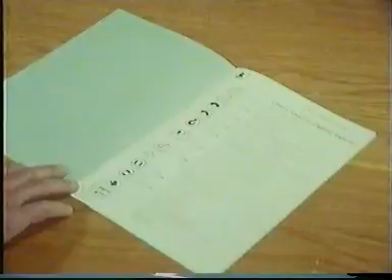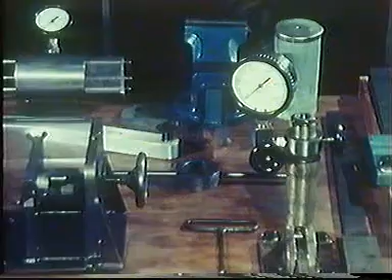Fuel valve overhauls should be carried out in a special locality where there is no risk of contamination by swarf or grit. Start by laying out the tools and checking that everything is in order, especially the working surfaces of the grinding plate and the grinding ring, etc.

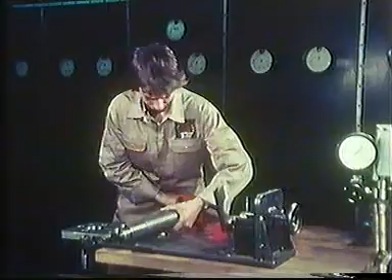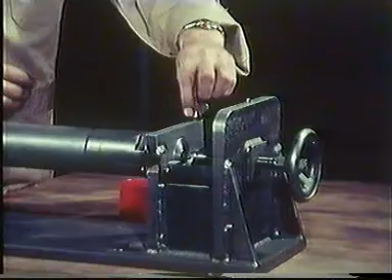The fuel valve overhaul should be carried out in a special clamping jig which is supplied with the engine. A bench vise should not be employed. Take out the adjusting screw together with the feeler pin, thrust spindle and spring.

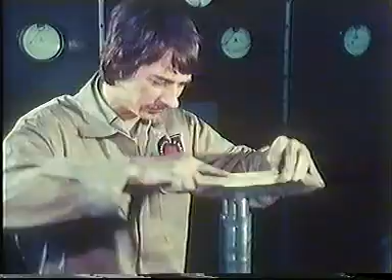Unscrew the nuts for the slit filter and remove the filter by means of the extractor tool, which is positioned by screwing it into the threaded hole provided in the filter body. Raise the valve into the vertical position and clean the nozzle with a wire brush. Before undoing the sleeve nut, any carbon deposits between the nut and the nozzle should be removed with a milling tool.

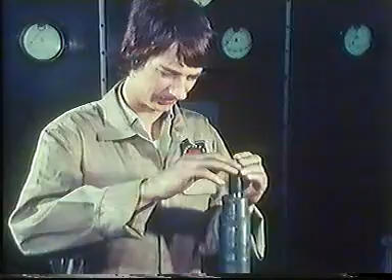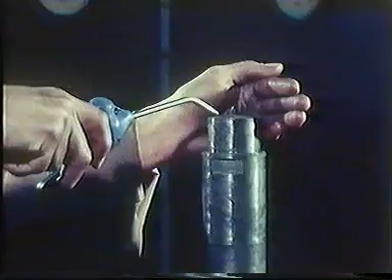Lower the valve into the horizontal position and lock it in the clamping jig. Before loosening the sleeve nut, the clamping jig thrust spindle must be tightened against the nozzle. Otherwise, the dowel pins in the nozzle or the housing might be shorn when the sleeve nut is loosened. The sleeve nut should be loosened with an impact spanner, not with a torque spanner. Remove the sleeve nut, nozzle, spindle guide assembly and rubber ring.

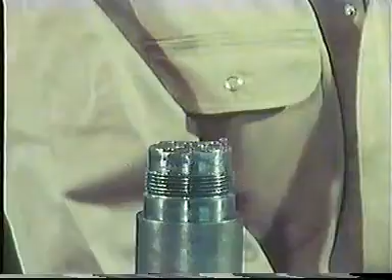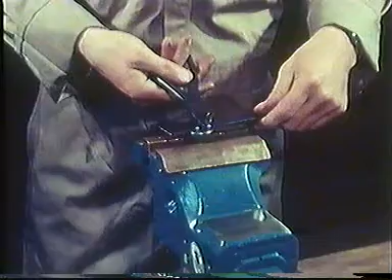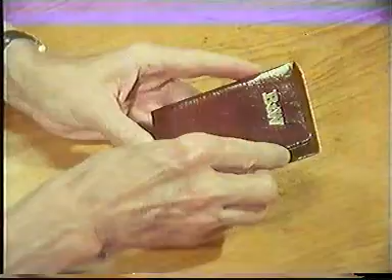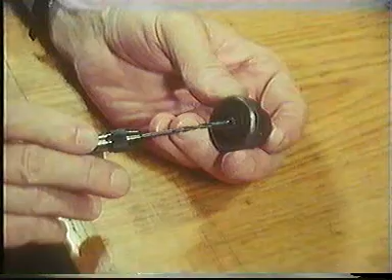Take out and scrap the dowel pins in the housing and nozzle. Remember to place a protective plate under the pliers in order not to damage the mating surfaces, which must provide a perfect oil-tight seal. The atomizer hole cleaning drills, fixtures and test pin are supplied in a separate plastic case. During cleaning of the center hole and atomizer holes, the nozzle tip should point upwards to allow any dirt to fall out.

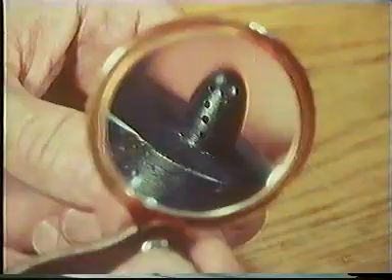Examine the atomizing holes by means of a magnifying glass. They must be circular and keen-edged. Having ensured that the hole geometry is in order, the dimensions are checked by means of the test pin. If the pin is able to enter one or more of the atomizing holes, the nozzle must be scrapped.

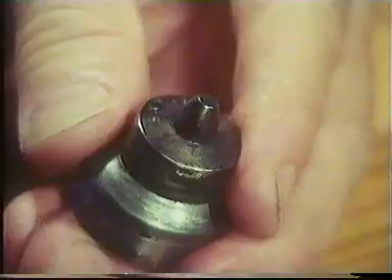The sealing face of the nozzle against the spindle guide is to be lapped on the grinding plate using emery powder number 70 and some solvent. Apply steady movement to and fro and do not turn the nozzle. Note that the nozzle is shifted to the dry part of the plate during the last few strokes.

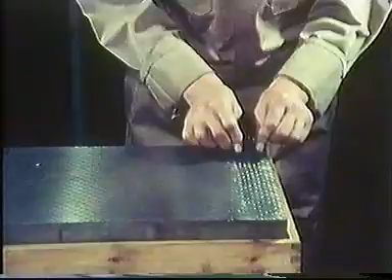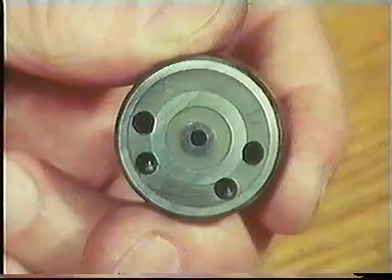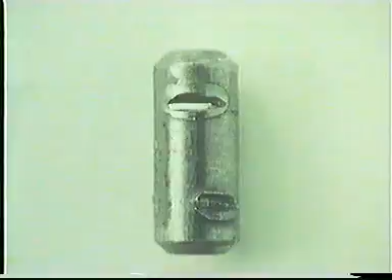After the lapping, there must be no marks or scores in the sealing surface, apart from the very fine lines that result from the lapping. Flush the nozzle through with a solvent and blow it dry with compressed air. Always fit new dowel pins. The old ones must not be used again.

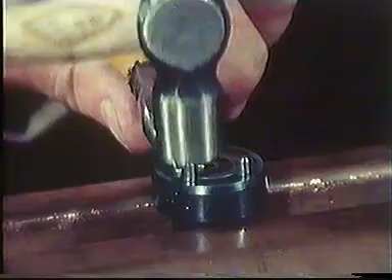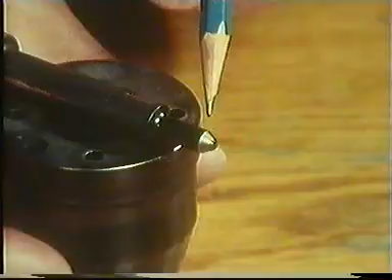Check the spindle and spindle guide. If the spindle is corroded, or if the width of the conical seat is more than approximately 0.5 millimeters, the pair must be exchanged. These parts cannot be reconditioned on board.

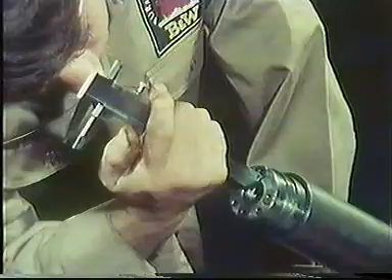The lift of the valve spindle is checked by first measuring the distance between the sealing faces of the housing and the upper edge of the stop ring. In this case, it is 13.4 millimeters. Then, secondly, the distance is measured between the top of the spindle and the sealing face of the spindle guide. Here, it is 12 millimeters. The difference indicates the lift of the spindle, which in this case is 1.4 millimeters.

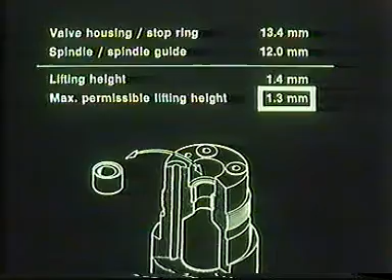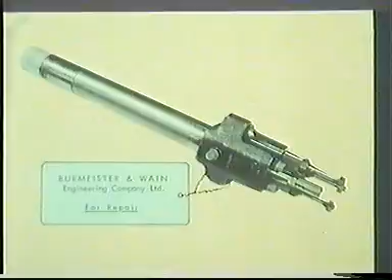For all KEF type engines, the maximum permissible value is 1.3 millimeters, and consequently the stop ring must be taken out and a new ring adapted. This job should normally not be carried out on board, but instead the housing should be sent either to Burmeister & Wain or to one of our authorized repair shops.

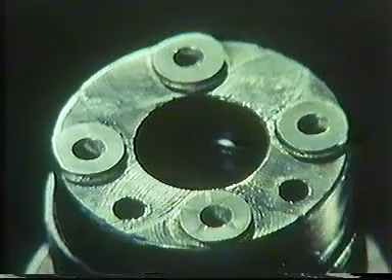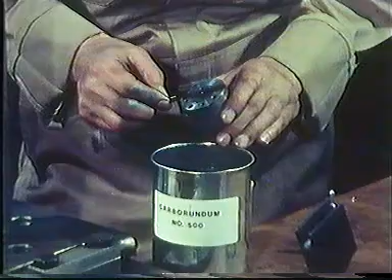If damage marks or scores are found on any of the four sealing surfaces of the housing, the spindle guide and housing must be ground to match. Before grinding, fill the apertures with Vaseline. This ensures that no grinding paste will enter them during grinding. Fit the guide ring on the housing. Using carborundum number 500, grind the spindle guide and housing to match.

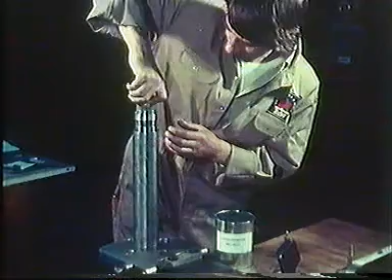After the grinding, wipe the parts carefully clean with a clean cloth and check the sealing surfaces. Lap the spindle guide in the same way as the nozzle, the last few strokes being on the dry part of the grinding plate.

After the lapping, there must be no marks or scores in the sealing surface, apart from the very fine lines from the lapping process. Flush the spindle guide through with solvent and blow it dry with compressed air.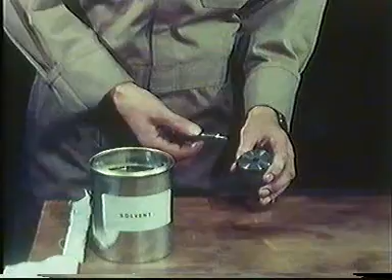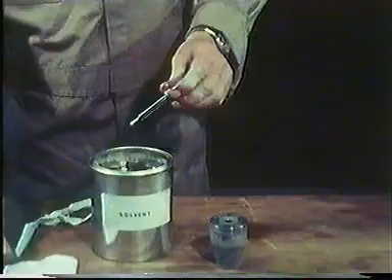Then, clean the bore of the spindle guide with a clean cloth on a small wooden stick. Wipe the spindle dry and dip it in acid-free oil before inserting it in the spindle guide.

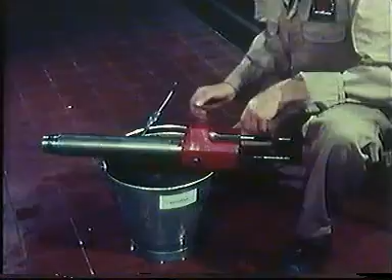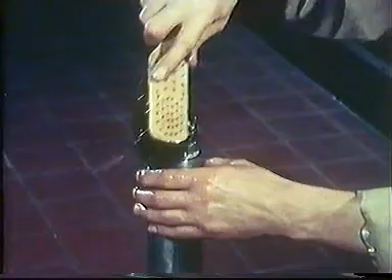Clean the housing thoroughly with kerosene and blow through with compressed air. Note the direction for blowing. Always blow from the valve head towards the nozzle end.

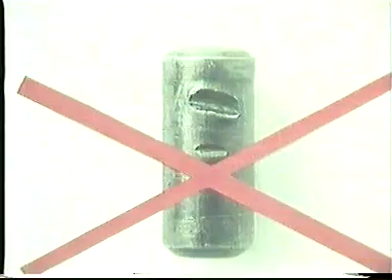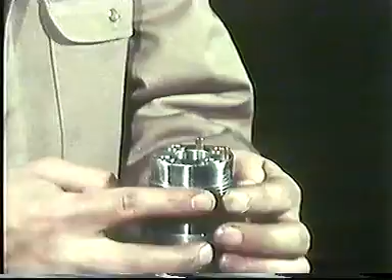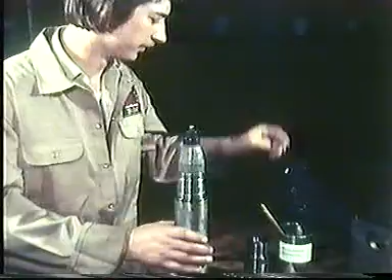Once again, remember to fit completely new dowel pins. Also fit a new rubber sealing ring between the housing and the sleeve nuts. Then, with the spindle in place, fit the spindle guide on the housing and thereafter place the nozzle on the spindle guide. The threads and pressure faces are smeared with molybdenum disulfide.

Mount the sleeve nut and tighten it lightly by hand. Lower the valve into the horizontal position in the clamping jig and lock it. Remember to tighten the clamping jig thrust spindle against the nozzle tip. This is in order to avoid shearing the dowel pins, which would result in misaligned atomizer jet directions in the engine cylinder.

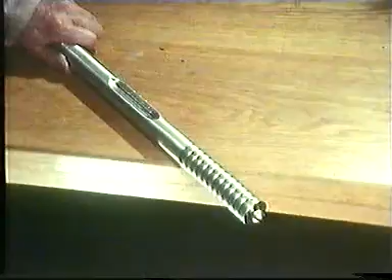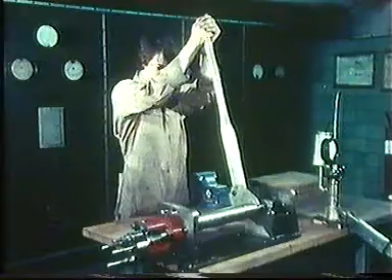The tightening torque for the sleeve nut is indicated in the data book. For the K84 type, it is 40 kilopond meters. This torque spanner will give a jolt and a click when the correct tightening torque is reached.

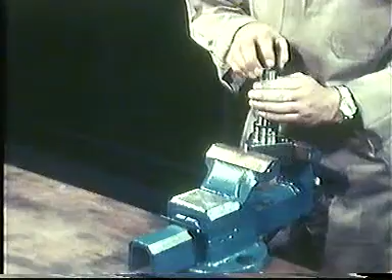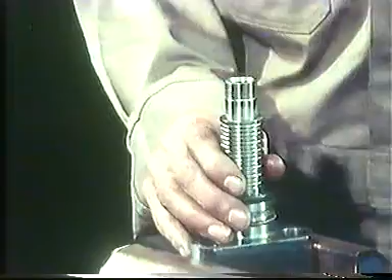Dismantle the slit filter in a vise fitted with protective jaws. Unscrew the sleeve nuts. Remove the sealing ring, spring guide and spring and take out the non-return valve disc. Take out the vent screw and remove the thrust ring.

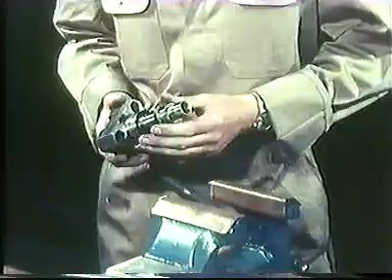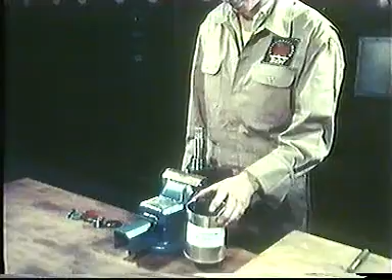If there are damage marks or scores in the valve seat, it should be ground with carborundum number 500 on the grinding mandrel supplied. If there are marks in the vent screw seating, this can be refaced with a pin drill fitted in an ordinary hand drilling machine.

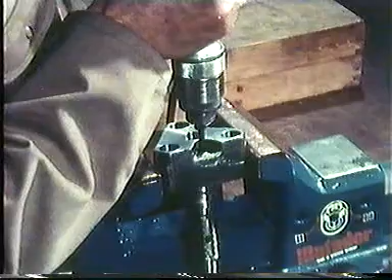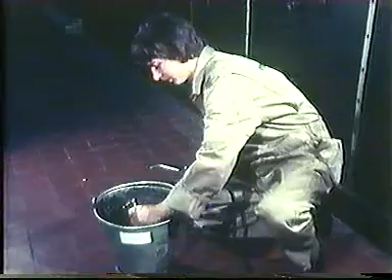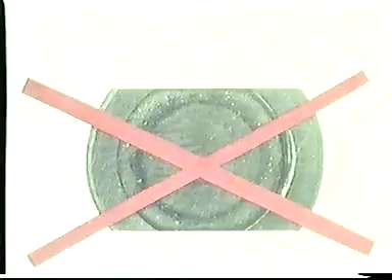After refacing the seat, the filter housing should be cleaned with kerosene and blown dry with compressed air. The disc of the non-return valve should not be reconditioned by grinding. If it is defective, it must be scrapped and a new one fitted. A convenient method of replacing the valve disc in the housing is, for instance, to stick it on the end of a pencil by using a small blob of Vaseline.

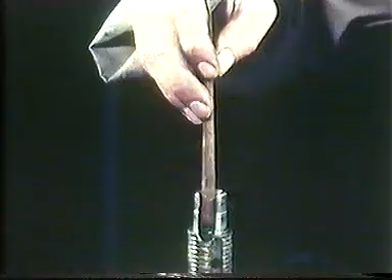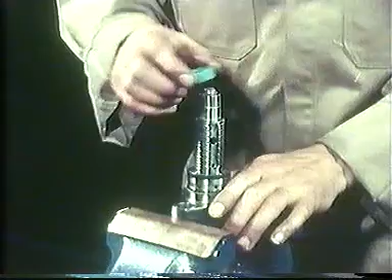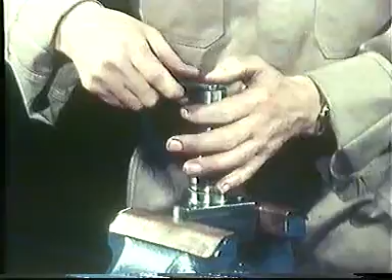Position the spring, spring guide, thrust ring, sealing ring and sleeve nut, and tighten the sleeve nut with the pin spanner. When the filter has been assembled, it should be tested in the jig supplied. Clamp the filter in the testing jig.

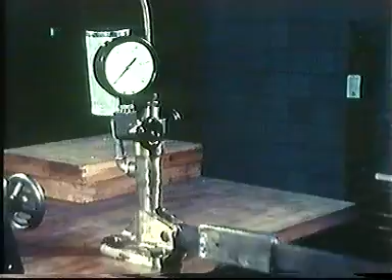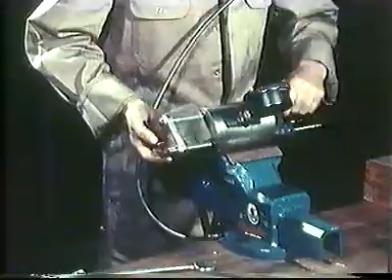Fit the pressure pipe on the filter inlet and check the opening pressure of the non-return valve. The opening pressure is stated in the data sheet. For the K84 engine, it is about 13 kilopond per square centimetre. When the opening pressure has been checked, the pressure pipe should be removed from the filter and the testing jig with the filter should be rotated half a turn in the vise. Then the pressure pipe should be connected to the testing jig.

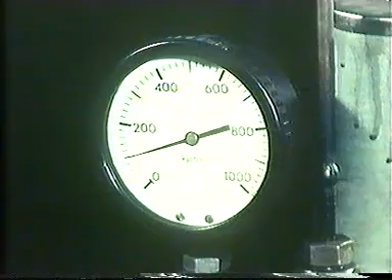The non-return valve and the filter sealing ring should remain oil tight at a pressure of 100 kilopond per square centimetre. This can be checked by ensuring that no oil leaks out at the filter inlet. Smear the filter with molybdenum disulfide and insert it in the housing.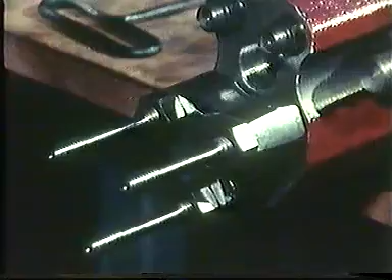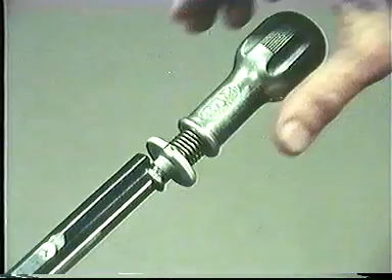To ensure even tightening, the filter stud nuts should be tightened in 3 distinct stages with a torque spanner. The first stage is performed with a torque spanner set at a moment of 3 kilopond meters. Before each tightening operation, the knurled disc of the spanner should be retracted and rotated a quarter of a revolution. When the correct tightening torque has been reached, the knurled disc will be released.

The second tightening stage is carried out at 6 kilopond meters. Ensure that all 3 nuts are correctly tightened at each stage. The third and final tightening is to be made at 10 kilopond meters. Insert the spring guide, spring, thrust spindle and adjusting screw in the housing.

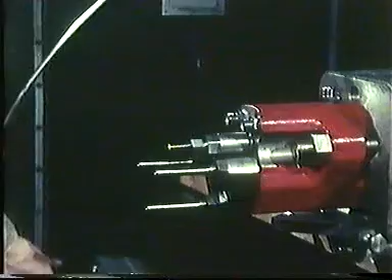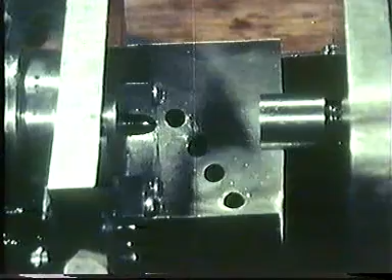Mount the protective guard and connect the test pump. Open the vent screw and pump until bubble-free oil flows out of the return oil outlet hole of the housing. Close the vent screw and pump again. The oil jets from the spray holes should then pass through the holes of the control screen. This indicates that the oil jet directions will be correct in the engine cylinder.

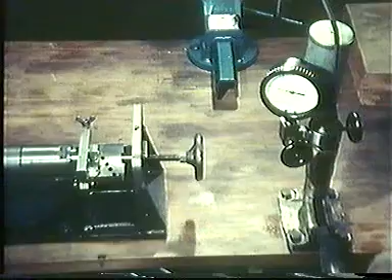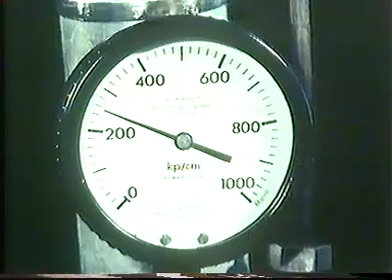Adjust the valve to the opening pressure stated in the testbed table. For the K84 type, it is 250 kiloponds per square centimetre. When the opening pressure has been attained, tighten the adjusting screw lock nuts.

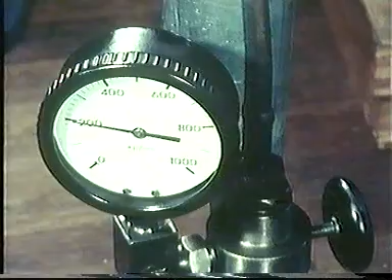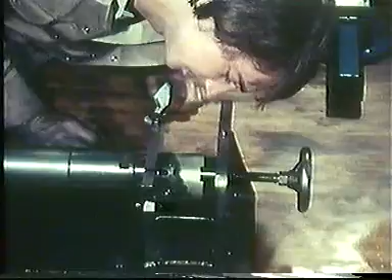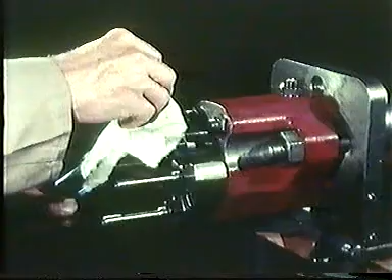Wipe the nozzle tip dry with a cloth and hold the pump pressure for a couple of minutes at 200 kiloponds per square centimetre. If the nozzle shows signs of sweating or dribbling, the valve must be dismantled and the fault traced. Before checking the atomization, the pressure gauge valve must be closed in order to protect the gauge. Check that the cooling oil ducts are free from congestion by blowing through with compressed air.

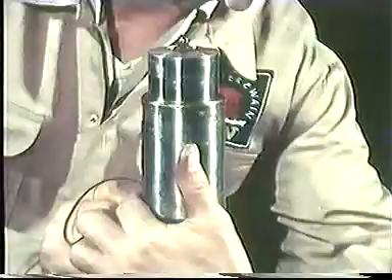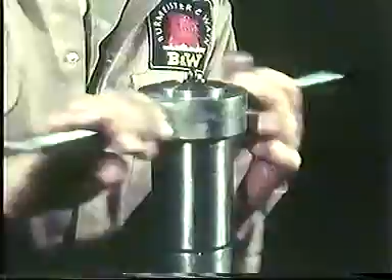In order to enable the valve to enter the sleeve of the cylinder cover, trim off the outside projecting edges of the rubber sealing ring between the sleeve nut and the housing. Any damage on the contact face of the sleeve nut where it bears against the cylinder cover should be ground away by means of the grinding ring and carborundum number 120.

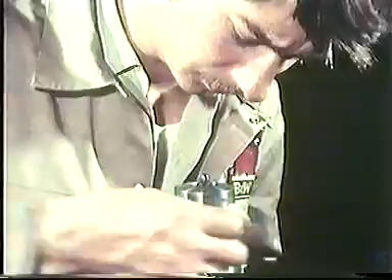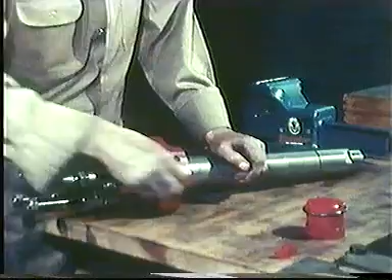When the overhaul has been completed, fit protective caps on all pipe connections and on the nozzle end, and push the rubber sealing ring into position on the valve shank. The reconditioned valve is now ready for remounting in the cylinder cover or for storage as a spare.